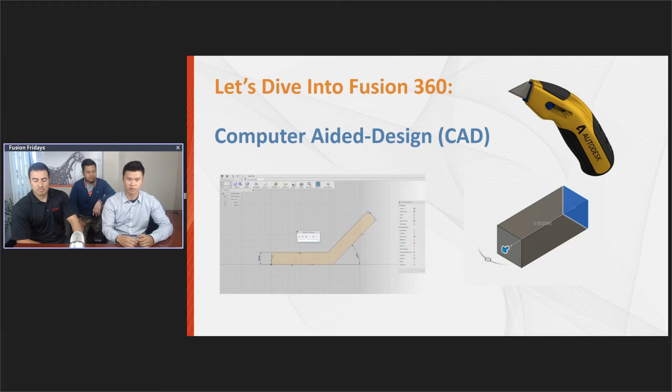So now we're going to go into Fusion 360. And like I said earlier, Fusion 360 has everything you need in the design process, including computer-aided design, which is one of the crucial components of Fusion. So now we're in the Fusion 360 workspace, and if you're familiar with 3D modeling, you can see that there's a sketch panel here to create 2D sketches.

There's a create panel here where you can create your 3D models, a modify panel here where you can edit those 3D models, and so forth.

Today we're going to be making this chair right here. I chose this example because I thought it was a good idea to combine both the parametric or geometric features, like the legs, as well as the seat, which uses T-spline, organically shaped freeform modeling features. So let's go ahead and create a new design.

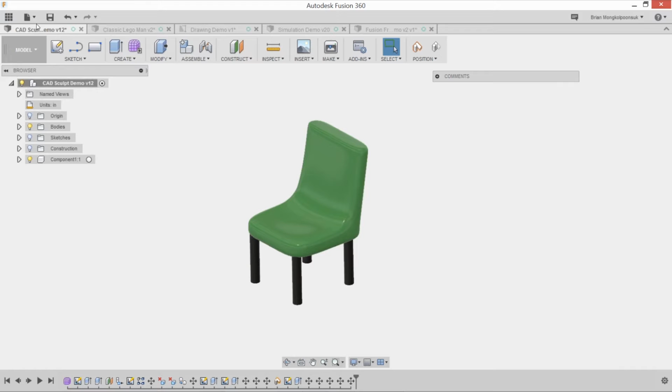I went up to File, New Design, and now to get started, let's go to Create Form, and now it tells us we're in the sculpt environment, so we'll hit OK.

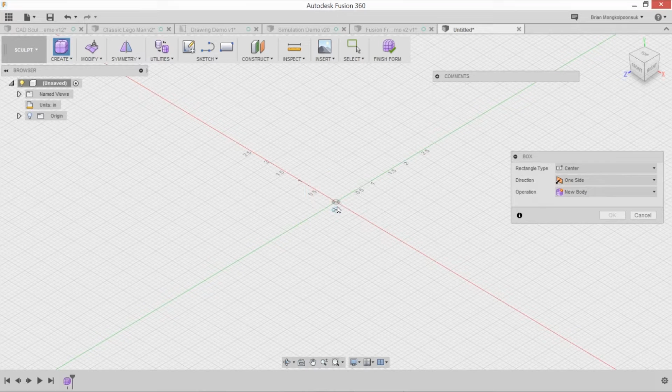We'll start off with a box, so I go to Create Box. The cool thing about Fusion is that once you stop moving your mouse while using a tool, it tells you what you need to do next. So now it's asking for you to select a plane or planar face to create your box. I'm going to select this plane right here. Now it's asking us for a center point when I don't move my mouse, so the center point of my box - I'll go ahead and select the origin.

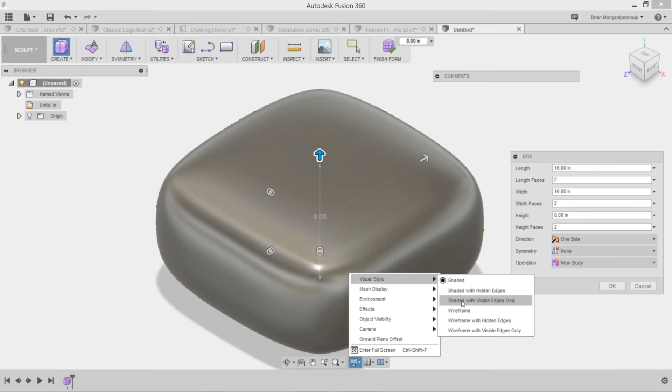I'll make this box 16 by 16. Now before I hit OK, you can see a preview of the box, but first I want to add some edges to the box so I can edit it later. So I'm going to go to Display Settings and hit Shaded with Visible Edges Only.

Now I'm going to increase the complexity of this box by using these tools here, adding more faces. Then with this arrow tool here, I'll decrease the height. Once I'm happy with my object, I'll hit OK.

So what does more faces add to the model? What do you get with having more faces versus less, Brian? Since you have more faces, the box becomes more complex, so you can pull little bits and pieces of the box rather than pulling like half the box whenever you extrude it. Right, so you have more precise control. Correct, yes.

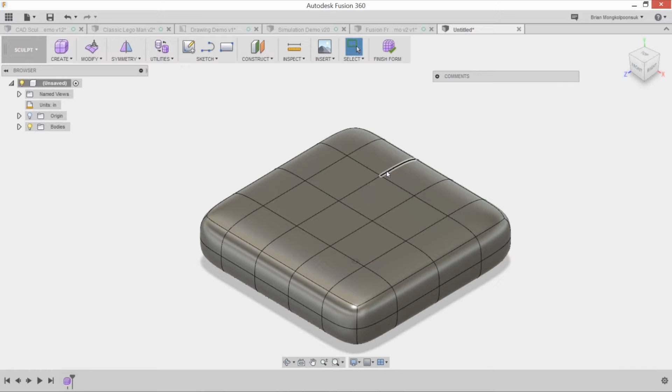So now we have the place to sit on for the chair, and now we want to create a backrest. To do so, I'm going to select these back faces right here, and I'm going to right-click Edit Form. I'm going to use this arrow tool to pull up a backrest, but it pulls my model apart rather than extruding it.

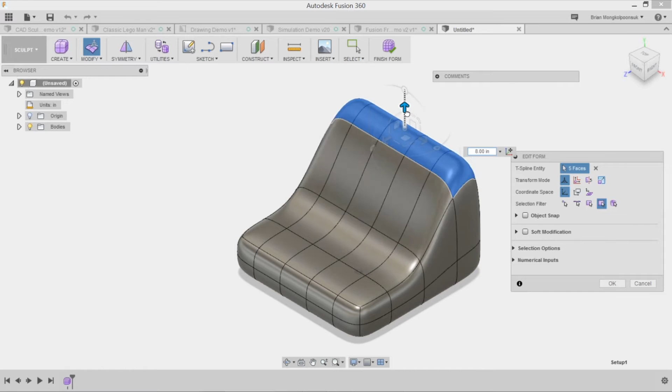I would rather have it extrude and not have to pull up these parts, because this is where you want to sit. So I'm going to go ahead and hold the Alt key - in essence, the Alt key just adds material to your surface. I'm holding Alt right now and pulling it up, and once you get the height that you desired, you can hit OK.

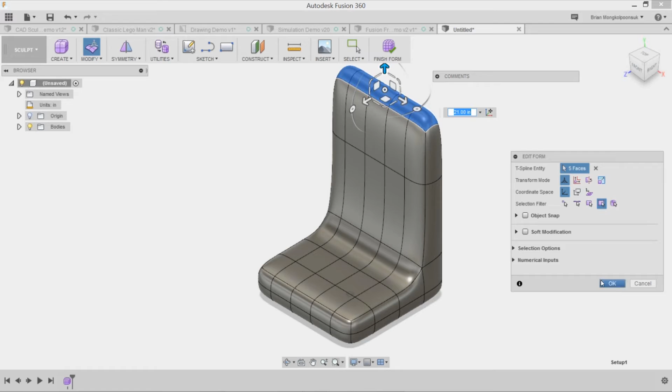So now we're getting a general form of the chair. But you don't want to be sitting at a 90-degree angle chair, so you're going to want to angle it backwards. I did a little research and found out 15 degrees was a good angle to sit at.

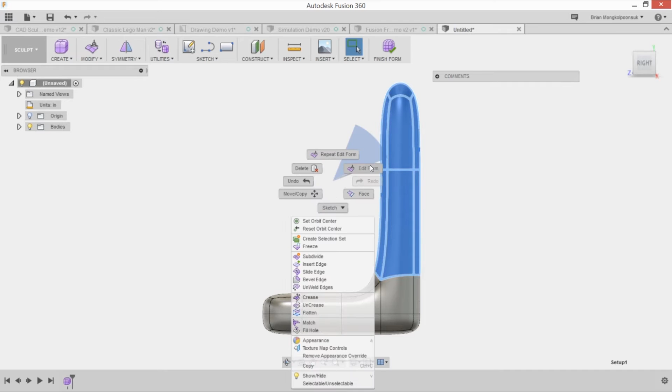So I'm going to go ahead and highlight these faces here, right-click Edit Form once again. So yes, a chair ergonomics expert, you want to know that. Yeah, I should start my own business.

You can rotate this back to -15 degrees, and then you can use this tool here to manually pull back the backrest. Once you get that, you can hit OK.

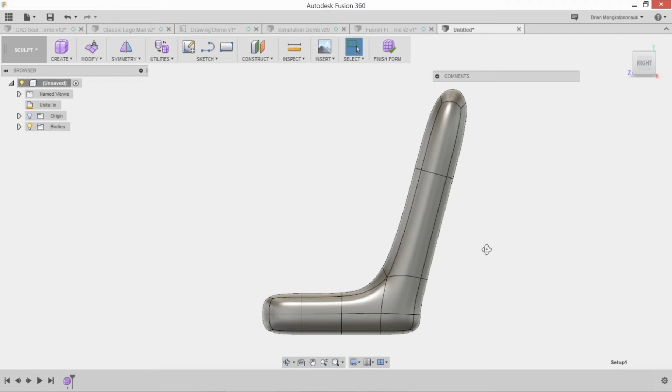Before we exit the sculpt environment, I want to create a little indent here where we sit, so then when you sit down in the chair, you kind of get centered to the middle. I'll go ahead and hold Control once again and highlight those faces, right-click Edit Form, and then use this tool, push down 1 inch, and then hit OK.

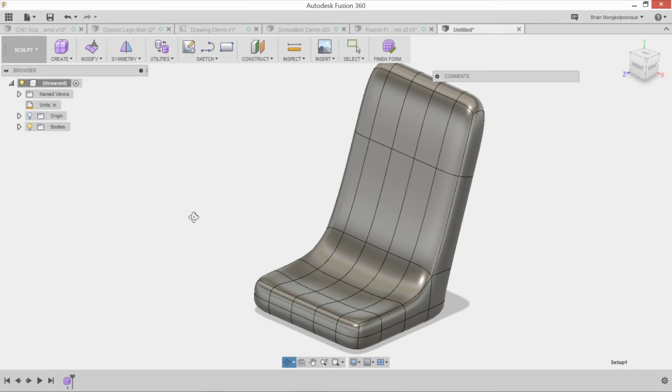So now once I hide my edges, you can see the shape, the form of the chair.

Now we'll exit the sculpt environment, and now we'll create the legs for the chair. But before we create the legs, I want to create a plane that lies in the middle of the seat, so then we can create a sketch on that plane and then extrude.

So is this a surface model, Brian, or is it a solid model? This is a solid model. Okay, yeah. So I'll go ahead and go to Offset Plane. I'll show my origin because I want to offset a plane off the origin.

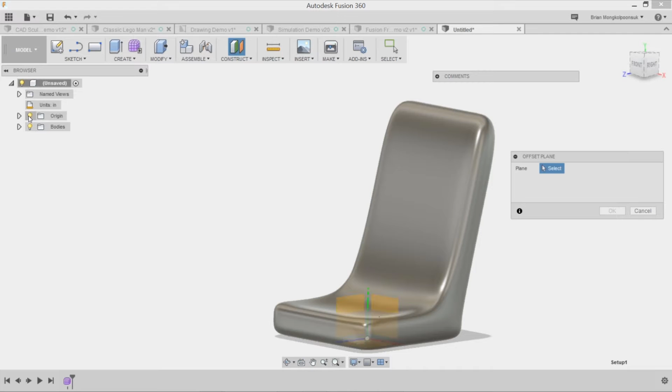And then I'll offset it 1 inch into my model, then hit OK. Select the plane that I just created.

Now I'll specify the center of my rectangle at the origin, and pull it out to about 12 by 12 inches. I'm going to use the corners of these rectangles as the center points of my circles for the legs.

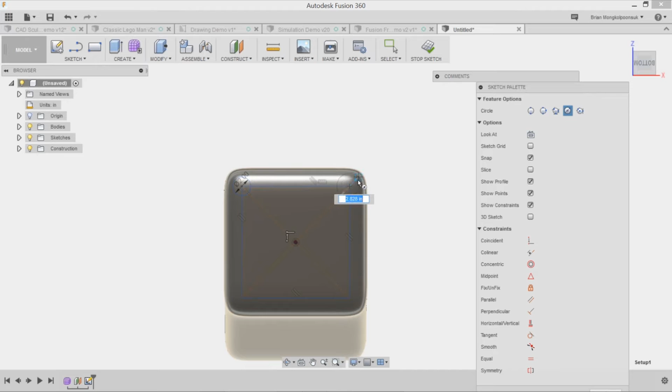And the way I'm getting to the circle tool is by hitting C on the keyboard for the center diameter circle tool, then hitting 2 for the diameter.

Most of the hotkeys from AutoCAD transfer over to Fusion 360. Yeah, AutoCAD and Inventor, a lot of the hotkeys do translate over into the tool.

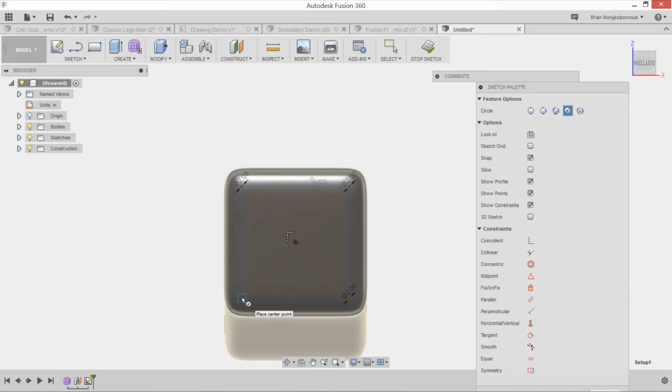As you can see here, as I'm hovering over the corner of the square, a little blue square pops up. That tells me it's going to snap to that corner, so I can be sure that the center of my circle will be the corner of this square.

So something like this, where you're generating and extruding closed profiles, creating sweeps and stuff, is more familiar if you're moving from a tool like SolidWorks or Inventor. Whereas some of this more organic modeling is more familiar for people who may have come from Rhino or Alias.

Just want to let you know there are multiple ways to build something. You could very well build that chair back with parametric modeling, it's just going to take a little bit longer.

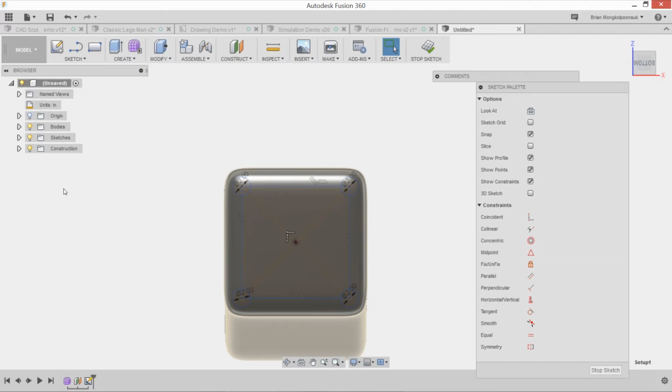So now we're going to hide the body for a brief moment so I could select the circles of this chair. Then I'm going to show the body again so I know which direction I want to extrude in.

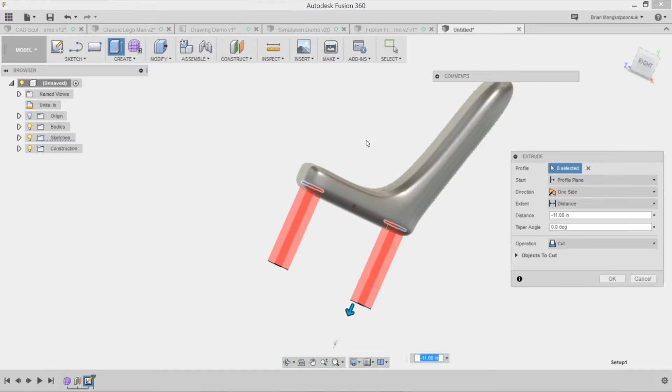I'm going to extrude in this direction about, let's say, 16 inches. You could pull that arrow, or you could just type into the distance box. Yeah, right, we can type it in here as well.

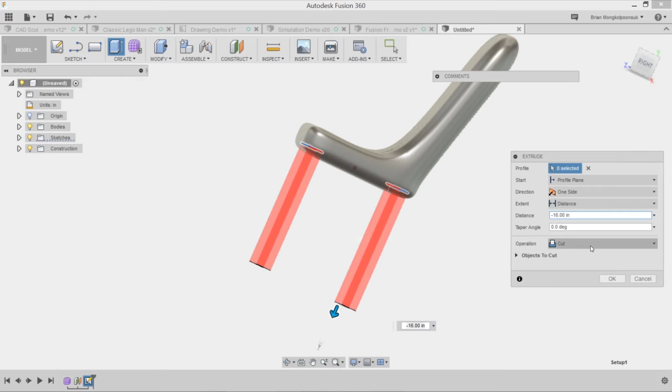If you want to be very specific, like 16.67, that's not something you're going to get with the arrow, but you can always just plug it in if you have a parameter that you need. And instead of a cut operation, I'm going to do a new body operation, then click OK. So now we have the shape of the chair and the model designed within a couple minutes.

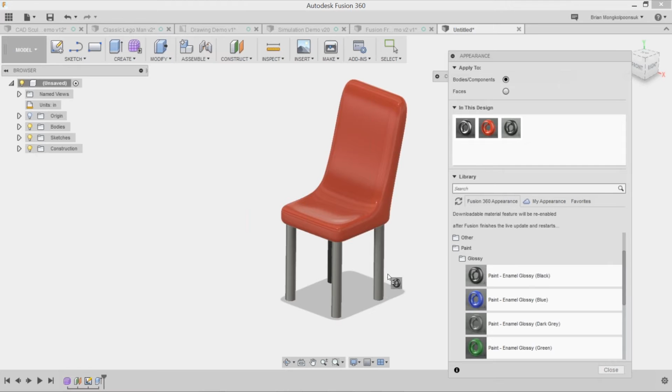And to get a final set, hit A for appearance. I'm going to click and drag and drop some colors, and there we go. The cool thing about modeling in Fusion is you can have other team members collaborate as well.

So to invite other team members, you can go to the data panel at the top left-hand corner of the screen and go to the People tab. They can insert their email address here. As you can see, there's Alex and Nigel in here, and they have access to editing your model as well.

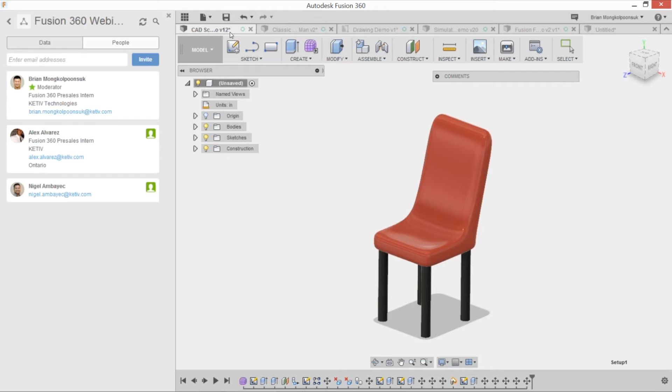So once I save this model, for example, let me go to the green chair I have earlier. Once I save the model, they can see it, make changes, and then save it, and then I can see the newest version of it. It's that kind of system, the kind of cycle that Fusion is built around.

They can also make comments here in this comments tab. As you can see here, I requested that the chair, which was earlier red, be made green, and now it's green and it's a new version. Fusion organizes all these comments as well.

So there is version control with Fusion. It's lying on the same backbone as Fusion Team or Fusion Lifecycle, but in regards to the data management side only. If you have questions about the data management capabilities of Fusion 360, let us know. It's certainly not as robust as something like Vault, but it does get the job done depending on what specific things you need.

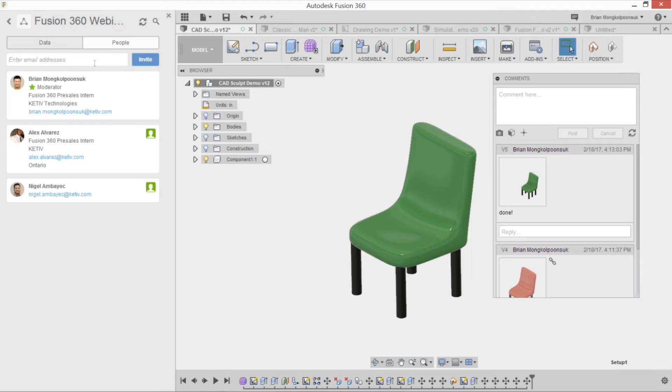Being able to interact this way in Fusion, you no longer need to send each other emails or upload your drawings or models to Dropbox, because now you have all the files in Fusion. There will no longer be missing links between assemblies, no longer be lost files, and no longer be saving over each other's files.

They're all organized. So I was talking about saving files over each other. In Fusion, let's say you have version 6, and then you or someone else on the team saves over it as version 7. You still have access to your version 6. And if you want to keep your version 6, you can go to promote version and make that the most current model that you guys are working on. Or you can open it here and rename it something else.

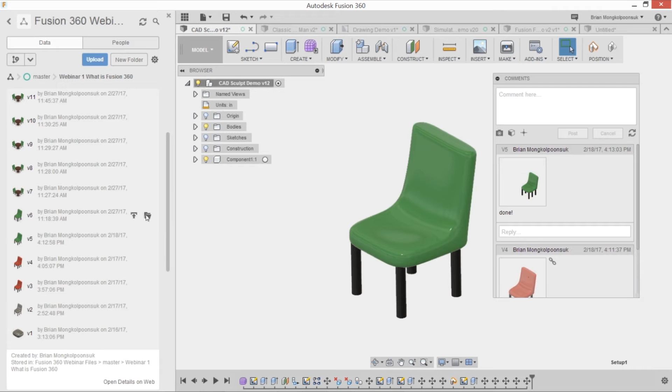The backbone for all of this is Amazon Web Services. As most people know, the cloud is where all these things lie. So these files, to make a silly reference to a great movie, the files are not in the computer. No one gets that? Okay, cool. So the files don't lie locally, they lie in the cloud, kind of like your cloud storage. If you do need them locally, there is a way to get the files to your computer, though. You just don't have all the versions and stuff.

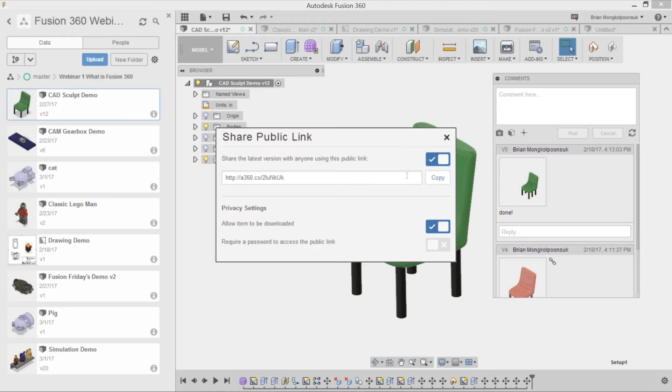If you want to send your chair model out to a customer or someone who you don't want to have access to editing your chair, you can just right-click and hit Share Public Link. This box allows you to copy and paste this link, and by checking this box, they can download it as well, but they can see a 3D viewing model of your link, which I'll show you right now.

If I go to my web browser and paste that link in, whoever you sent that link to will be able to see the most updated version of your model in this 3D viewer. You're able to, one, not need any plugins or add-ins to view it. Two, like I said earlier, it's the most updated version of your model. So if you sent your model out two months ago and they want to see your progress today, they can just click on that same link because it updates as you update your model.

You can think of it this way, if you know some of the Inventor verbiage: this is associative to the newest version of the model in that sense.

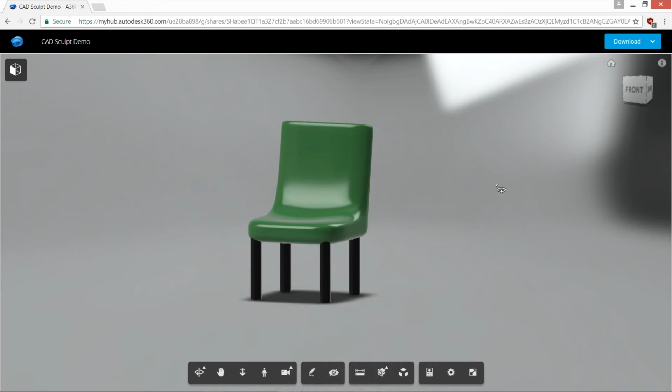Since I checked that download box earlier, the person with this link is able to download your model in all these different file formats. So if they wanted a STEP file, but later decide they want a SAT file, you don't need to send them a new file—it's all located here. And all you need is a web browser. You can even do this on your phone too, so it's really cool.

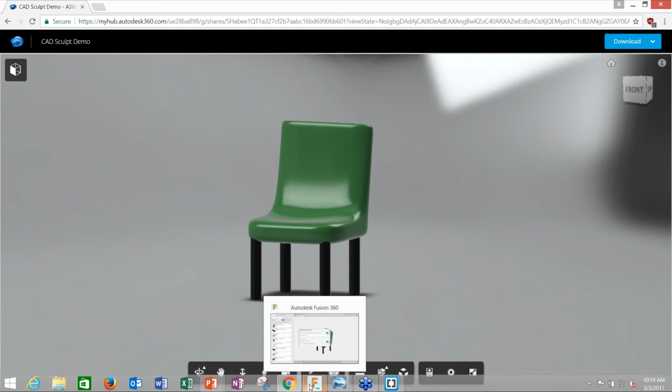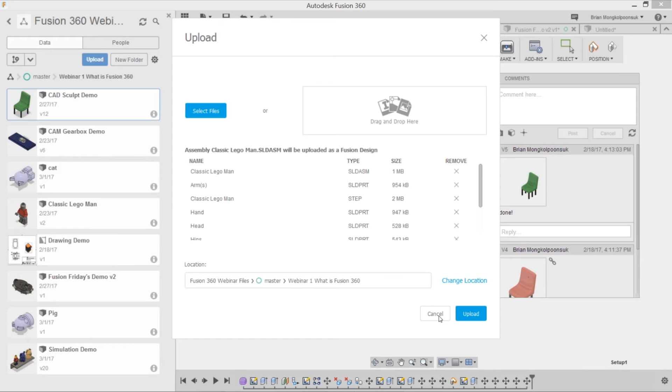Going back to Fusion, lastly, here's an example. If your customer is sending you a SolidWorks assembly and you want to open it with Fusion, you can do so by going to the Upload button, hitting Select Files. I have this Lego Man SolidWorks assembly that I got from GrabCAD.com. I'm not going to hit Upload because I already uploaded it, but you can see there's an assembly file here, and once it finishes uploading, it'll appear something like this.

The cool thing about Fusion is that it recognizes the top level component or assembly file and puts it at the top here. Then for the rest of it, it recognizes where each part was located and how it was associated with the other components, and reads it down here.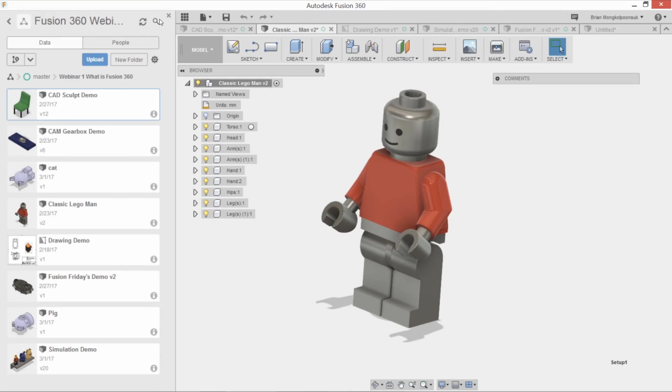Now I'm going to hand it over to Alex so he can show you guys how to create toolpaths with the CAM feature. Thank you for that, Brian. All right, so let's say you have the final revision of your part—what would be the next step?

For most people, the next step would be manufacturing your part, whether that be machining it or 3D printing. Fusion 360 gives you all that access without having to leave the page. Let's take a look at this example - this is the gearbox, our current design for our senior design project. This part was actually designed in SolidWorks and brought into Fusion 360, so Fusion 360 gives you the capability of importing different file types.

Typically when you're going to machine this, you would start off with your stock. We set our work coordinate system over here on the top left, and once you select that setup, you get a dialog box on the right. Here you would select your operation type, which in our case is milling, and the orientation of the z-axis - which way is your positive and negative z. Fusion 360 gives you a visualization when you're hovering over a certain box. I'll demonstrate that once I jump into Fusion.

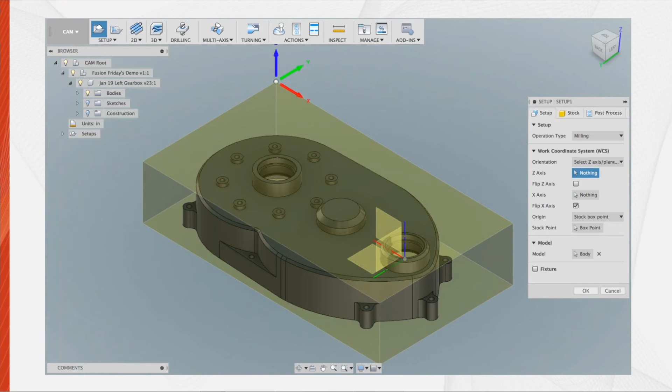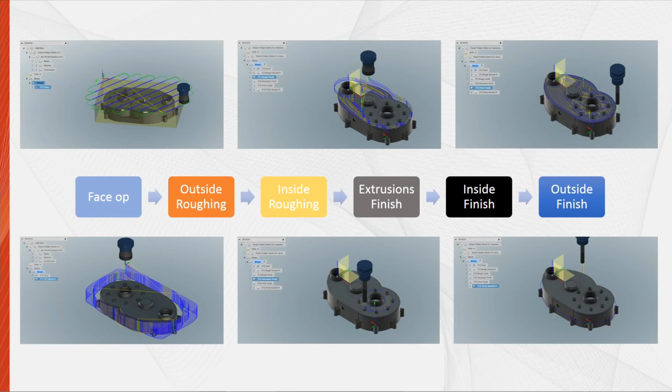So what are some common toolpaths that Fusion 360 has? As you see here, we have some facing operations, outside roughing operations, and finishing operations. This is more or less the process we took to get this gearbox done. Let me jump into Fusion so we can see the simulation.

Once you have all your toolpaths, you want to make sure your machine is going to do what you want it to do. You want that assurance when you're at the machine, especially if you're a self-taught machinist or new to machining - you don't want to crash the machine, because that's going to be a pretty expensive mistake.

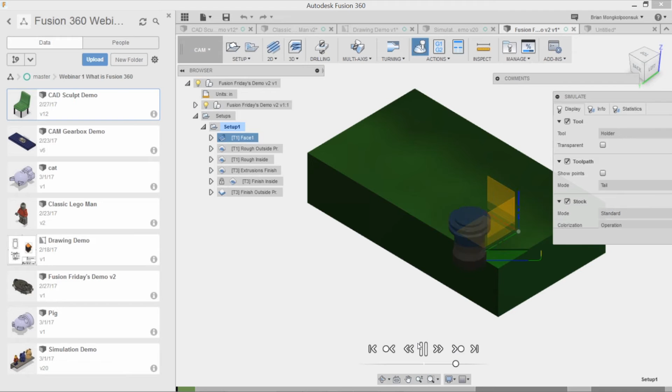So let's go over to the top and click Simulate. We see that we get a visualization of the stock. Let me just play the simulation and fast forward it a little bit. So we see that all the toolpaths we created, Fusion 360 is simulating.

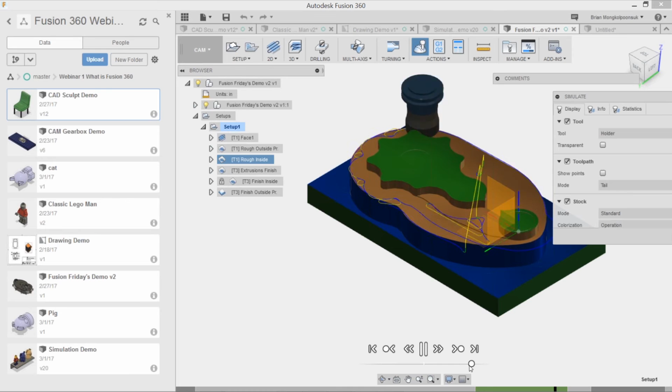When I first started using the CAM capabilities within Fusion, I was a little worried the simulation wasn't going to do exactly what I wanted the machine to do, so I was hesitant at first. But being that I actually programmed all the toolpaths and ran the machine myself, I noticed the machine was doing exactly what the simulation in Fusion was showing. So you can be sure that the simulation within Fusion 360 is exactly what your machine will be doing.

Okay, let me just rotate it. So as long as you put the right tool in the machine - correct, yeah, and you set your correct height offset. If you're familiar with machining, you'll know about setting your height offsets and selecting your correct work coordinate system.

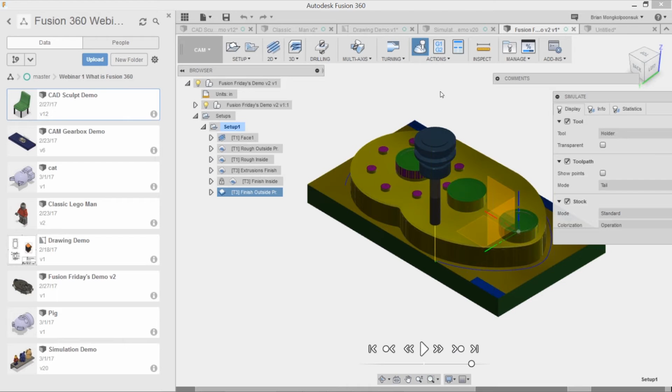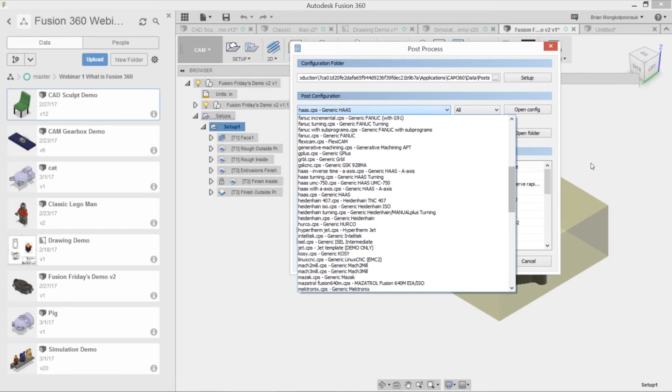Once you've verified that your simulation is correct, you can go ahead and post the G-code. You go over here to the top on post process, and you see you have different posts - Fusion 360 comes preloaded with a variety of post processors. Some common ones are Fanuc, Haas, Heidenhain. Now if you don't see your post processor here, you can contact us and we will help you get that started.

So let's say you're ready to go machine. Once you post it, you will get something similar to this, which is the G-code. I just posted the first operation, which is a facing operation, and you see Fusion 360 gives you the complete code for that facing operation.

And also the post processors - they're always adding new ones, so if they don't have yours yet, you can request that and they'll make it for you. Correct, I remember writing this - yeah, back then this was all hand code written, so it was pretty crazy how it was.

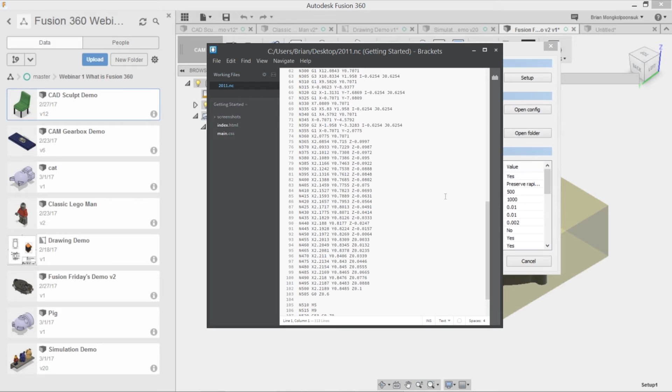All right, so with that I'll hand it back to Brian. All right, thank you Alex. Now we'll go over rendering. It's easy to hop from workspace to workspace - like right now we're in the CAM workspace. If you want to go to the rendering workspace, you can just go down to here and then click render.

Rendering is useful because you're able to create these high quality images. This is an example of the chair I created earlier, and you can create these high quality images to send out to other people.

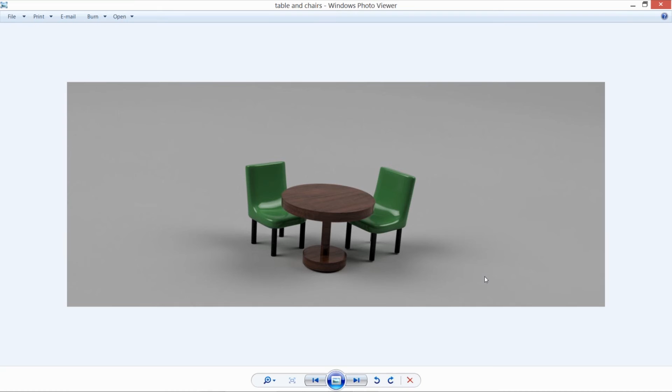For example, like Alex said, we're in the Baja Racing Club, and we created this high quality rendering of the car. With that, we're able to send it out to people, advertise with it, get sponsorships, and promote for new club members to join for the next year as well. So there's a lot of benefits to that, and you could also save it for your own professional documentation.

Certainly, and you can do animations and stills. A lot of times, when you need approval from a higher up, maybe someone in marketing predominantly, asking does this color look okay, does this look fine, or does it need to be smaller or bigger? Rendering is certainly a good way to represent that without actually having to build it.

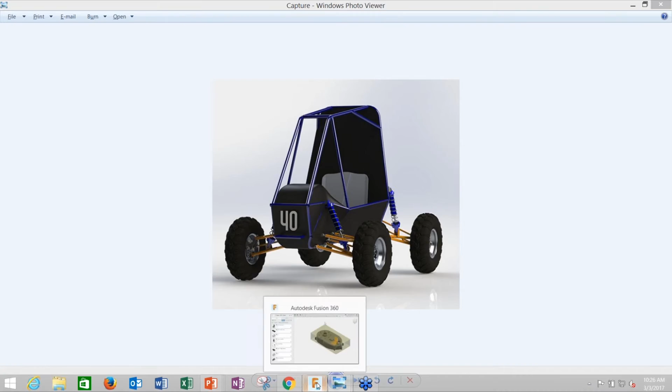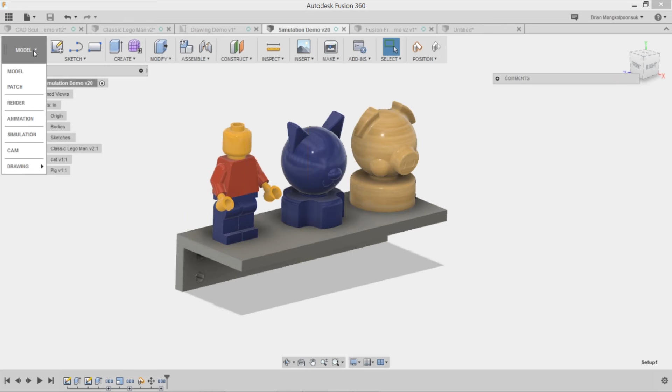So the next example: let's say your boss is asking you to test to see if your wall shelf will hold up against 100 newtons of force, or however much these guys weigh, and you want to show them a way to do that. To do so, you can go from the modeling workspace in Fusion to your simulation workspace.

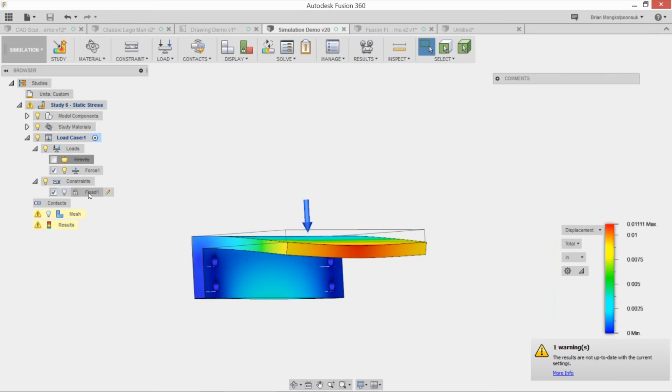As you can see here, I created a static stress study on this wall shelf that I created in Fusion. On the left, you can see where I applied forces - 100 newtons onto this face. Then I applied fixed points where the holes are, as if bolts were going through the wall shelf into the wall. Fusion shows different factors of safety and all the different stresses being applied to your model.

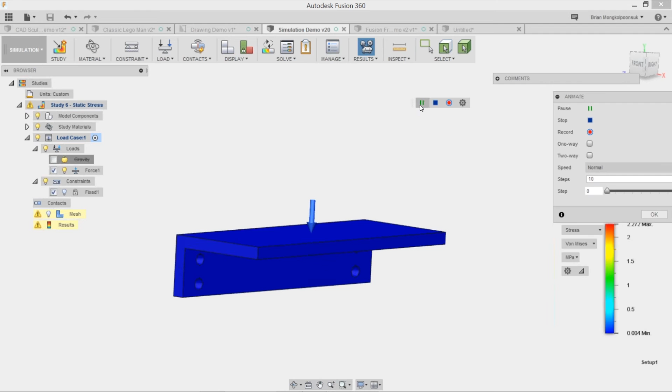If you show an animation, it exaggerates the deformation, because 100 newtons of force will probably not cause this to the model, but it gives you a good visualization of what it would look like. This is good for design validation, because if it doesn't pass the factor of safety here, you can go back to the model workspace and create a support bracket or whatever you need to improve the design, then go back to the simulation workspace and test it again.

It'll be updated because that model is associative to the simulation. So if you add something to the model, when you come back into the assembly, it'll have you update it, and you can just run the same study all over again with your updated model. It's not like you have to recreate this study all over again - that's a big deal sometimes.

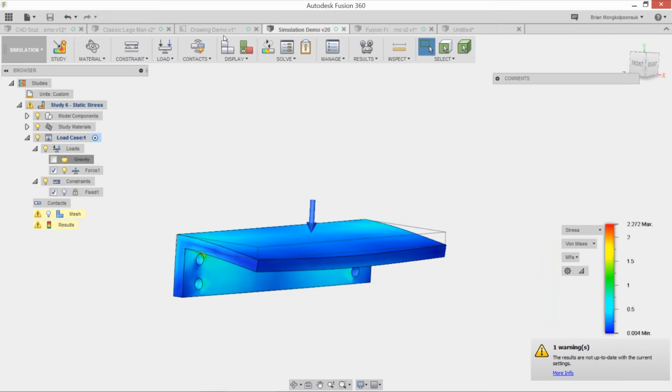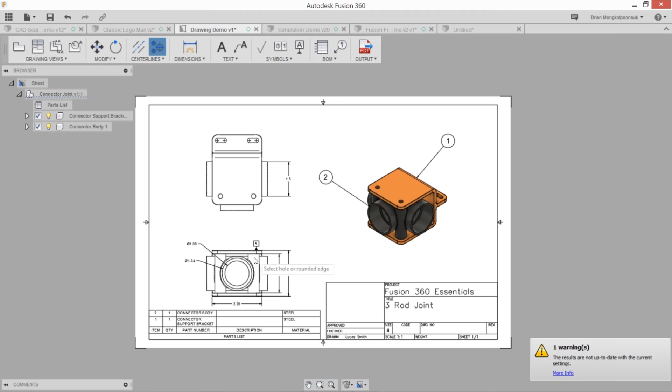Also, you can hit D for dimension if you want to further dimension your part, and then hit C to use the center mark tool. If you click on a circular body like this, it'll create a center mark for you.

Lastly, you can edit the title block here by double clicking on it, and you could update the revision number or create a drawing number for it.

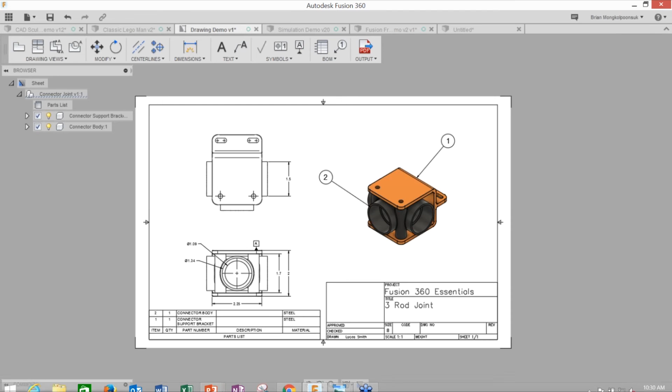Like I said earlier, you can send these out to machinists, and they can use the dimensions to create your part. So to recap, today we learned that Fusion includes everything you need to go from sketch to 3D model to fabrication, all without leaving the tool. I hope you guys now have your own answer to the question: what is Fusion 360?

Keep in mind, guys, this was just an overview of Fusion 360. Throughout the course of these next upcoming months, we are going to dive into the core of Fusion 360 and more of its capabilities. We didn't even touch the surface of what Fusion 360 can do.

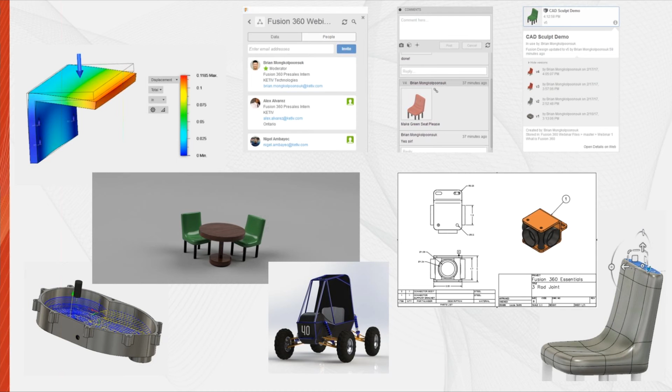Hello, and as you can see, we've all switched places except for Brian, I guess. He just ended up in the same place. But we do have a couple of questions. Like I mentioned, if you have any, feel free to type them into the chat box anytime. They're live right here on my screen, I can see them as they come in, and we'll make sure to address them. It looks like we've got a couple coming through, so that's good.

So first question came in pretty early here from Fernando, asking: does this software do flat pattern? For example, let's say you want to wrap the chair seating areas in leather or something along those lines. It does not at this point. You can't do flat patterns for a surface model like that.

For those of you asking the same question, oh, flat pattern reminds me of sheet metal, does Fusion do sheet metal? Actually, that's something they're working on right now, and it's in the Fusion beta. Yeah, they have a beta version release. So flat patterns and sheet metal are in the beta version of Fusion. They're going to roll that live here pretty soon, I think.

Along that same token, Fusion is really open with their progress moving forward in regards to adding new features to the tool. They're very transparent about that. You can just look at the Fusion website and see their roadmap, what they're currently working on, what they plan on working on in the future, and the timeline of when that's going to get implemented. That's all available to you on the Fusion 360 website, if you just Google that you'll be able to find it.

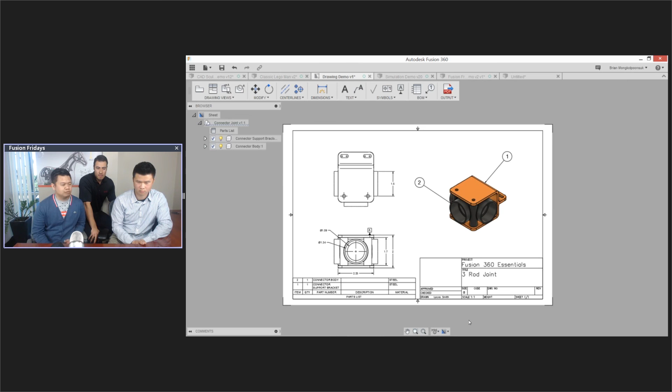You can go to the Fusion 360 website at Autodesk directly to see what they just released or what they're going to be releasing. We'll probably do some updates in regards to these presentations moving forward, so expect to see some of those in future sessions.

In the meantime, another neat thing about Autodesk is that they really listen to their customers. For Fusion, for example, they have a forum where people can talk to them about issues they've been having with the program, or something they could improve based on user experience.

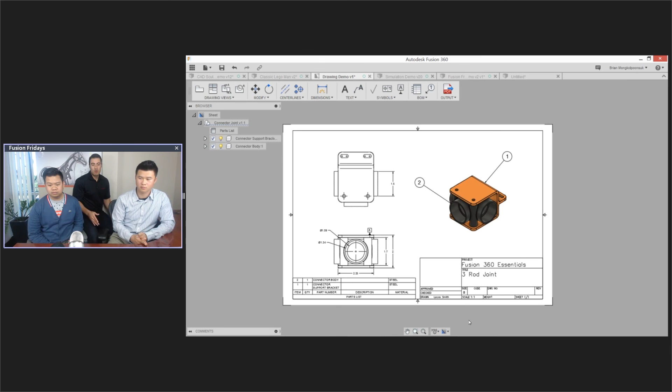Autodesk really listens to you. So all these updates you see — they pretty much try to reach out to the customer, see what they need help with, and then release updates based on that.

They don't shy away from releasing a hotfix for everyone if even just a handful of people are having a problem — they help them out.

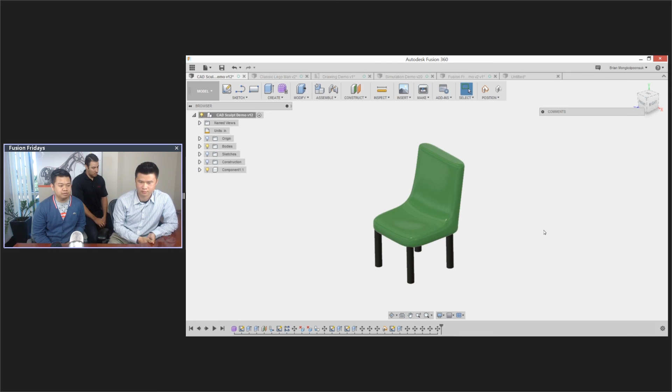Also, what I wanted to show you was the new beta test feature. You can go to Preferences under your name, then Preview, and they drop new updates in there, like the March update where they added water jet and laser support. If you check the box for those new updates, you'll be able to play around with them and see if they work for you. It's like applying plugins to another program, so you'll see those things pop up in your ribbon.